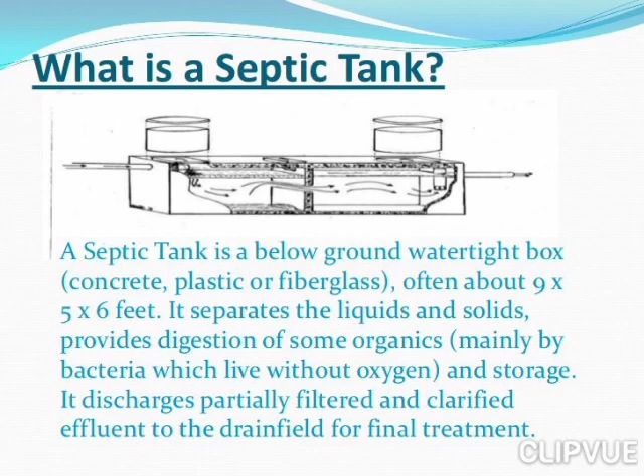Now a question arises: who has a septic tank system? So, if a building having a plumbing facility is not on a city sewer system, then in most cases it has a septic tank system, which is also known as an on-site wastewater disposal system or subsurface wastewater disposal system, to dispose of the wastewater.

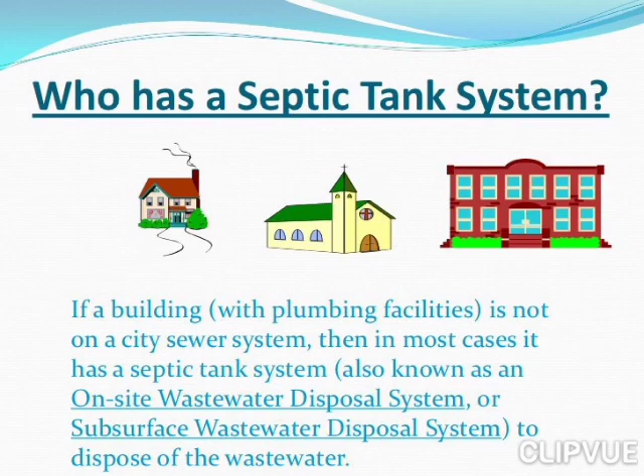So here we can see a diagram of a septic tank. It has an inlet baffle, the inspection port, the access port, another inspection port, the outlet pipe, the outlet T, and the scum and grease and the sludge.

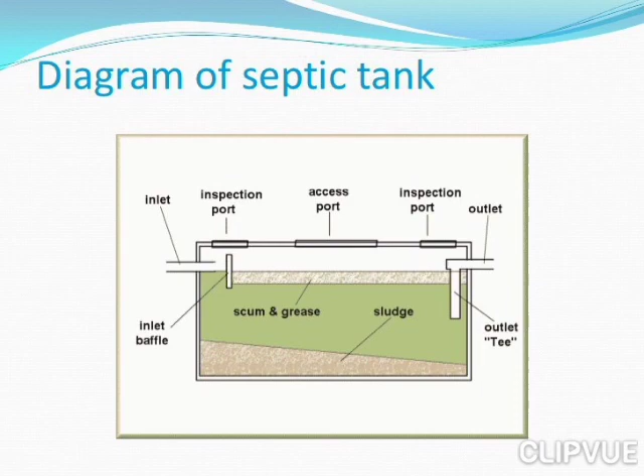So here we can see the cross section of a septic tank. Now in the given diagram we can see the two access hatches, and on the left hand side we can see the wastewater coming from kitchen and bathroom through the inlet pipe. So as it enters here, it is formed into actually three layers. The first layer is called the scum layer, the second layer is called the sludge layer, and after that the effluent from here is being transformed and thrown out through the effluent pipe outside, after which the effluent water is being sent for further treatment.

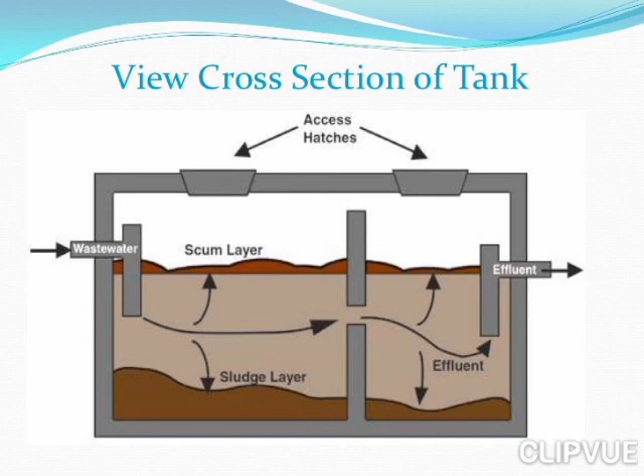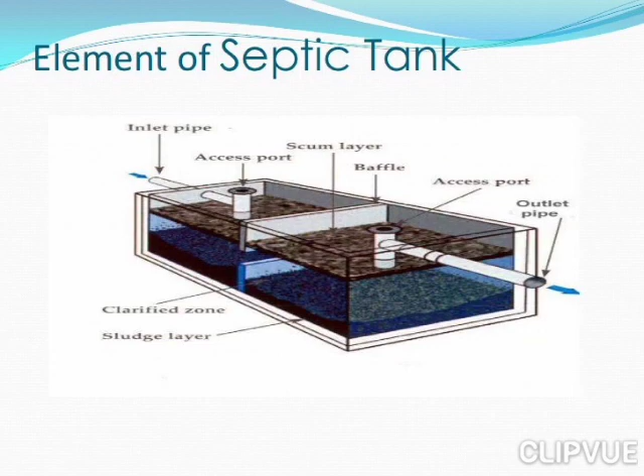So here is the full element of septic tank. We can see the inlet pipe, the access ports, the scum layer, the baffle, another access port, the outlet pipe, and the clarified zone along with the sludge layer.

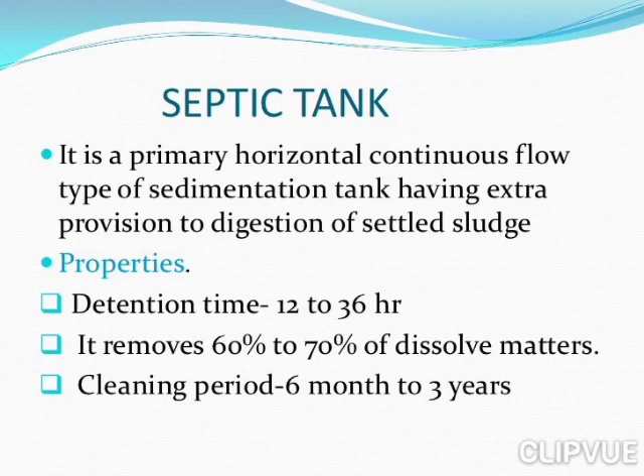So once again we see it's a primary horizontal continuous flow type of sedimentation tank having extra provision of digestion of settled sludge. So it has three properties. The detention time varies from 12 to 36 hours. It removes 60 to 70% of the dissolved matters, and the cleaning period is from 6 months to 3 years.

Now details about the sizing of tank. So generally it's prescribed for individual homes based on the home size. The criteria says that the hydraulic detention time plus solid storage varies from 1 to 2 days of detention time of the total flow of the design, and it adds solid storage volume which is equal to 1/3 to half of the above hydraulic detention.

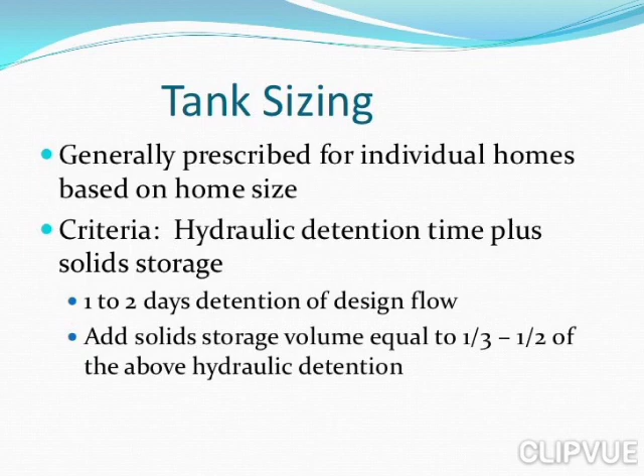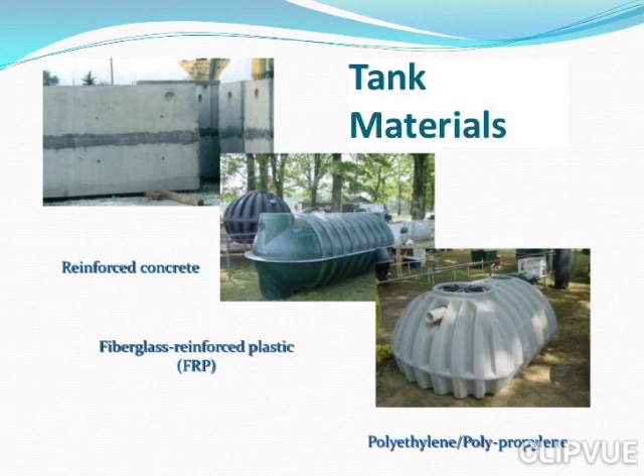Let us look at the tank materials. It is formed of reinforced concrete or fiberglass reinforced plastic and polyethylene or polypropylene.

So what actually happens in the tank? So we can see that from the left hand side the wastewater from the kitchen and bathroom enters through the inlet pipe, and these are separated in the form of scum in the upper layer and sludge in the lower layer. After that, the effluent comes out through the effluent pipe and goes out, which is being further processed for treatment.

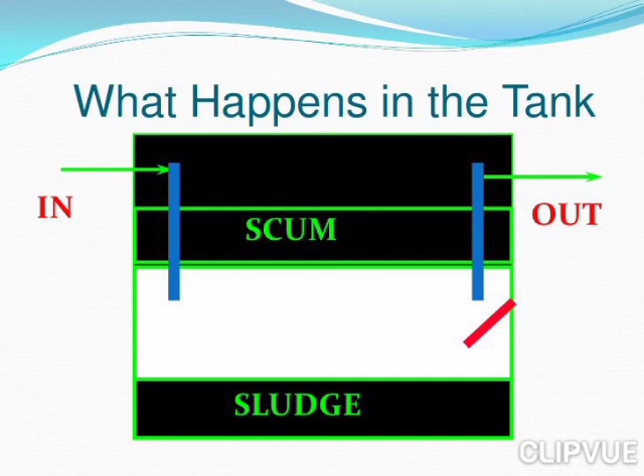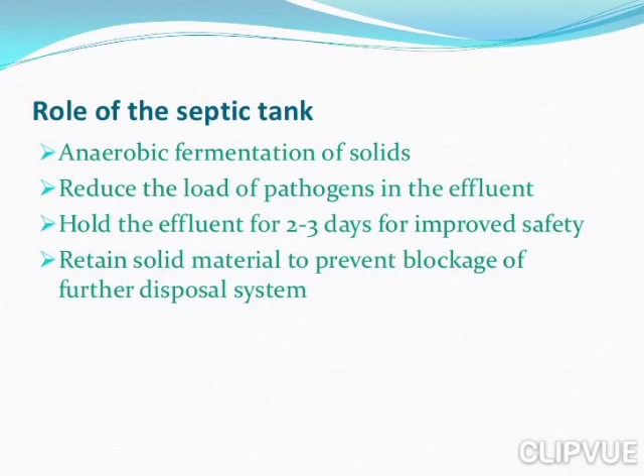The role of septic tank. Here, anaerobic fermentation of solids takes place. It reduces the load of pathogens in the effluent. It holds the effluent for 2 to 3 days for improved safety. It retains solid material to prevent blockage of further disposal system.

So, what are the advantages and disadvantages of a septic tank? Advantage: it can be easily constructed. There is no maintenance problem. It excellently removes BOD. Very less amount of solids are produced, and it's of low cost. Disadvantage: its size should be very large to serve many people. It has a smell problem. It needs periodic cleaning.

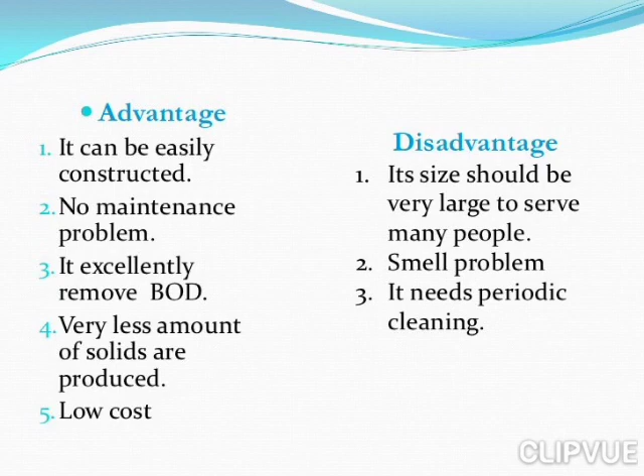So, here are some things which can be done to prolong the life of a septic system. First, we have to pump out the accumulated solids from the septic tank regularly. We have to check it every 3 years and typically pump it out every 5 to 7 years. We don't need to overload it. We don't need to put things which don't readily decompose into a septic system, for example, grease, cooking oils, sanitary napkins, chemicals, and so on. We don't need to drive on it or build over it.